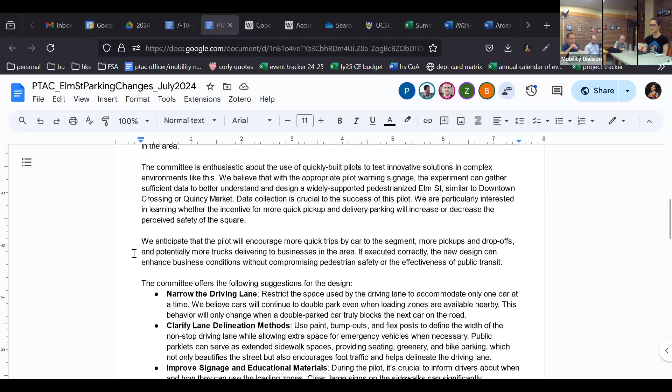For them to at least consider that this could be a big problem for the pilot. The second part was on the incentives, and what a policy on just allowing more cars to drop in and pick up the people, food and deliveries on and off the neighborhood would imply. And we do believe this would incentivize more cars on the road, which is not necessarily bad. We just need to make sure it's appropriate to what we all want to see over there.

And it potentially increases the ease of work for the business in the square. So there are pros and cons to the pilot.

We had a line back in the letter that simply says we would like to see other parklets and other infrastructure for other modes of transportation, specifically parking for bikes and some parklets for pedestrians, maybe some benches around, to help not only decrease or narrow the lane, but also help delineate the lane, and use that as an excuse to not only incentivize cars, but also pedestrians and bikers coming into the square.

So kind of trying to solve in a broader way than just a car problem. The points are highlighted in the letter. We talked a lot about how to clarify the driving lane, how to make sure, even if we say we just paint the ground, that cars can't just go around it, because if there is a way to go around it, it's likely that they will just double park anyway.

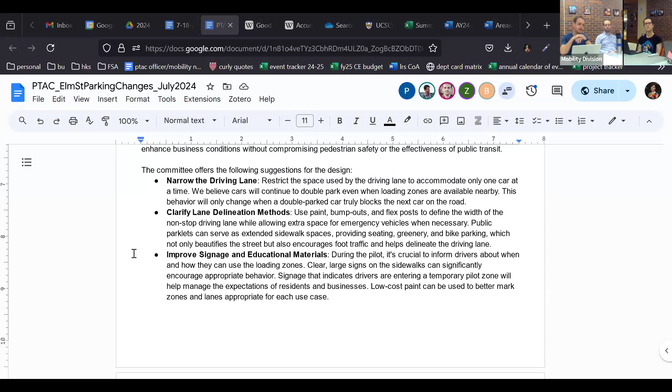And I think lastly, we had a point on daylighting and trying to make sure the crosswalks are free from any problems, both from cars, but also from bikers and other movement in the square. So we try to move away from parking large trucks close to the crosswalk, just for daylighting improvements overall when people are crossing the street.

And I think that's pretty much it. We're very much looking forward to seeing the results of the pilot. We think collecting data is extremely important. So we will see how well we can do that, and how well we can learn from this process, and hopefully figure out something that is different than, I think, anything else in the city right now. And hopefully it drives us forward in a nice way.

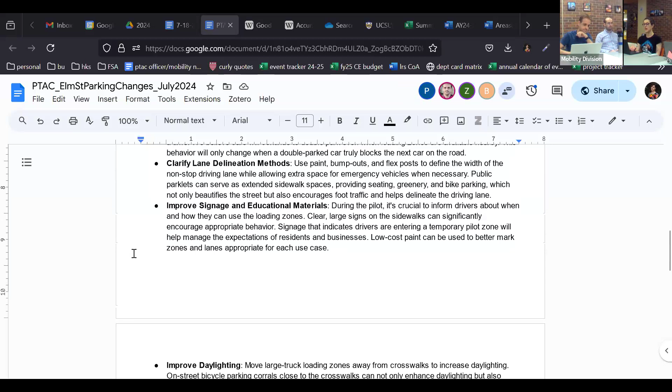Awesome. Thank you so much, Vitor. Anybody else who was involved in the writing of the letter want to chime in with any additional thoughts?

Okay, awesome. How about the rest of the committee? What are your thoughts on the letter? Do we think it captures all of the things that you were thinking about last month as we got introduced to the pilot? Are there things you would like to see added? Yeah, open discussion.

I'm having a hard time remembering all the details from the pilot from last month, but was the pilot written with 2 lanes of traffic on Elm Street in mind? No, it wasn't. But it seems like it's wide enough for 2 lanes, and so people use it that way anyway. Right, but with the parklets in, it makes it easier to delineate, and we had pavement markings before that indicate 1 lane.

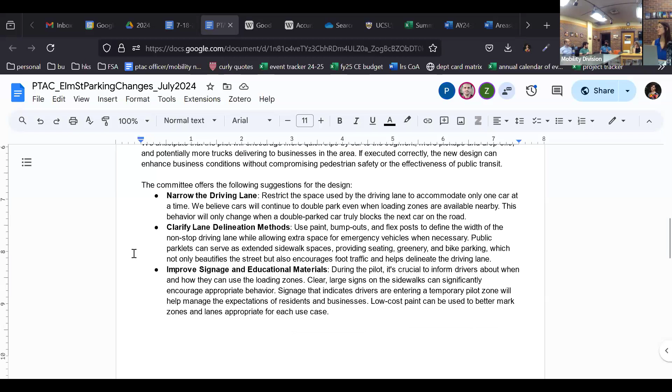So it's technically not 2 lanes, but the width makes it feel like it. I was very surprised when you said that last time. I went on Google Street View for that part of Elm Street, from November 2020, and it has all the markings on it. So I'm like, oh yeah, this is clearly the lane, and the parking section is a little larger, which is good for loading zones for trucks and stuff. So I feel like doing something like that again, if it's something the city would be willing to do, since it's a pilot maybe it wouldn't be, but that seems like a big win.

I hadn't considered it earlier, but having extra width near the handicap parking spots could also be pretty crucial for exiting and entering vehicles. So it's not as simple in many cases.

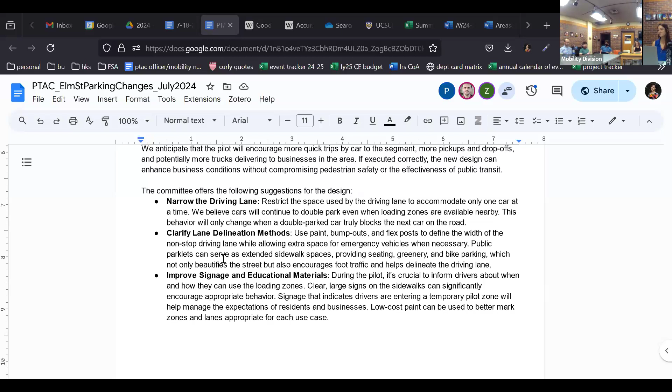I think this is a great addition to the pilot. I want to express support for the outline you gave us, Kate, because I think it's really smart to increase the amount of short-term parking on Elm Street, more so than there already is. That seems like the biggest use of the street right now, while maintaining a few spots for metered parking, just in recognition that there are a few businesses that could benefit from 2-hour parking, for example.

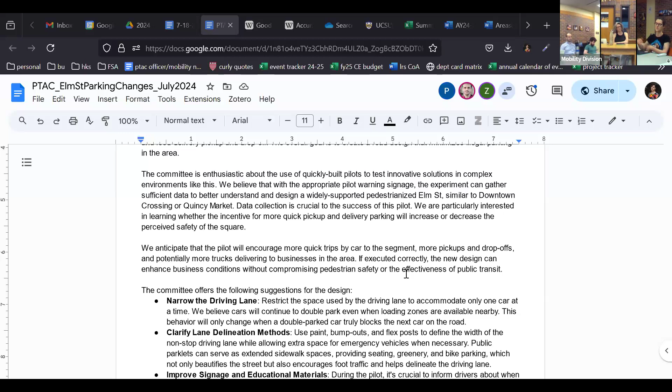I don't know if it's possible for this pilot, but for the future, I would love to see the bus stop actually be the length of the bus at some point. It doesn't seem like a huge deal for the tail of the bus to be hanging off the curb, but it does limit visibility to a certain extent for pedestrians. So in an ideal world, we'd love to see it aligned with the curb.

Oh, okay. Yeah, I saw someone putting one up further down. On Holland Street? Yeah, where on Holland? It's by the bus lane, right in front of Life Alive.

Is that the only other one that's going in? At this time, we put in new locations on Holland Street for the bus lane and the bus stop right outside the station, Davis Square Station, right in Davis Square. It is not the only location. We haven't determined where others are, but right now we're prioritizing locations where we have data showing it's blocked more frequently, which is primarily through parking tickets. We know that's not the perfect data point, but it's one we can build off of.

And happy to bring that back if that's of interest. Another time.

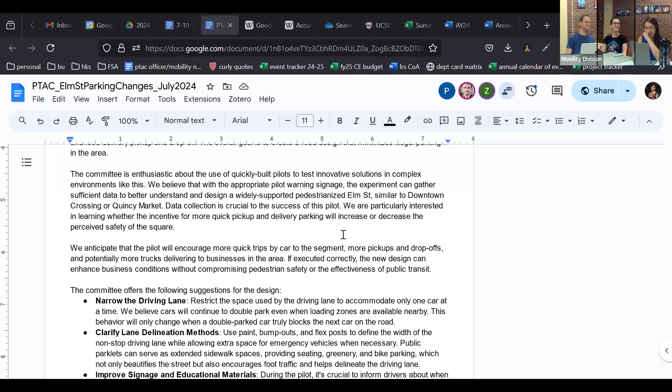I think I would like to maybe just open up the image of the pilot that you gave us last month, Kate, just to make sure there's nothing we're forgetting in this discussion before we take a vote on the letter. Just bear with me one moment, sorry, I have many tabs open today, so I can bring up the presentation really fast. Thank you, Kate. No, my apologies for not having it ready. Okay, here we go.

Would you like me to show the pilot proposal? Yes, please. Okay, and for folks joining hybrid, I'm just going to share my screen in just one moment. Can you all see that okay?

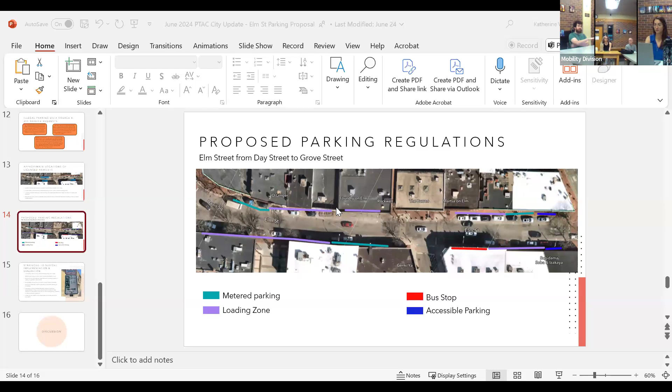This may be a bit of an aside, but has the city ever looked at temporary bus stop bump outs or bus stop extensions? I think I've seen in Cambridge, maybe during the pandemic, they had plastic sidewalk extensions essentially for bus stops, and then they later paved some. Is that something you've ever considered?

Yeah, so just to capture what you described, using what we would call quick-build materials, which are - there are some products.

One product we looked at a lot is made by Zicla. You might have seen they sometimes have products called armadillos. There's a really good example in Chelsea, done outside a community center, where you can extend the sidewalk so it stays the same height using really sturdy plastic, and they're modular. Just like Legos, you can connect the blocks, and they've used it for an MBTA project in Chelsea. I forget the specific route, but if you look at the Chelsea Flower bus stop, you can see an example of the sidewalk extension.

In terms of our consideration, we haven't determined if this is the location we would try it at this time, and the timeline of implementation would change, just to procure the products.

Any other thoughts on our stance, after being reminded of that?

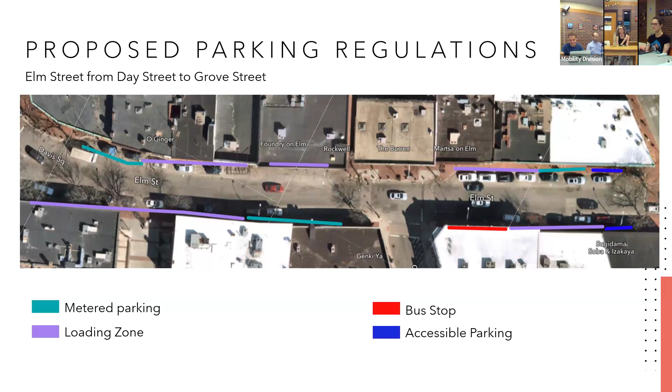So I motion that with the changes we've talked about today, we send this letter to Mobility as soon as Vitor is ready with a final draft. Do I have a second for that motion? I'll second. All in favor? Aye. All opposed? Abstentions? Okay, great. Thank you so much, everyone. Yet another letter.

So our next discussion or agenda item is on the latest proposed designs for Tufts Street. This is a project we've been talking about as a committee for almost a year now. So new members, this is kind of the second round of designs for Tufts Street? Third round of designs. It was 2 concept alternatives, 1 more developed concept, and this is the third kind of. Okay, cool.

So we've been engaging on the designs throughout the whole process, and this is our next chance to do so. Kate's gonna give an overview of the project and also the latest designs and what sort of feedback has gone into shaping those latest round of designs.

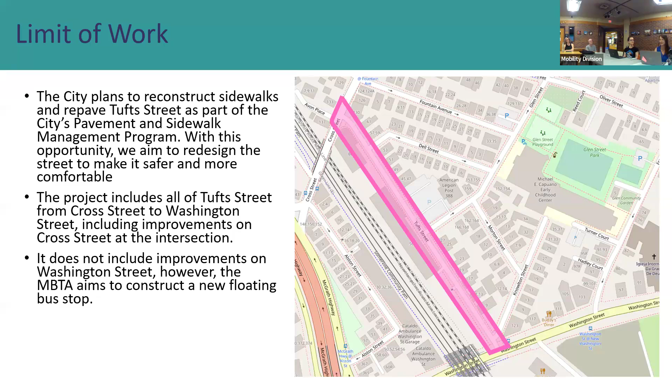Perfect. So as Alessandra described, we began this process about a year ago. We've gone through a couple iterations and we're now at the stage of what we call our 80% designs. This is where we're near final and moving towards finalizing those designs to prepare for construction. But we wanted to bring it back out to folks to see, did we capture what you had talked to us about and met the goals of the project, which is really to dramatically increase safety and truly construct a neighborway. Neighborways are designated in the bicycle network plan.

These are supposed to be very low volume streets. So even though this is in the bicycle network plan, there's co-benefits of just reducing speeds and the amount of vehicles on the street to make it a more comfortable place to be, especially when you're walking or rolling.

There are components in neighborways that include more shade coverage, so that you can have more comfort on the street. Art can be included. It's really a place for people and less about vehicles.

We've got some standards drawn from the National Association of City Transportation Officials, or NACTO. I think we talked about that a little bit in the past, but it's a really helpful guide for urban planners to look at making sustainable safe streets.

We've designated these in a lot of our areas that either are perpendicular to those long main streets or run parallel. The perpendicular is mostly because of the lack of north-south connections we have in the city, but also parallel. There's folks who might feel really comfortable being on Broadway and biking, but there's some who might feel much more comfortable—I'm picking one that's existing, Hudson Street, which parallels Highland.

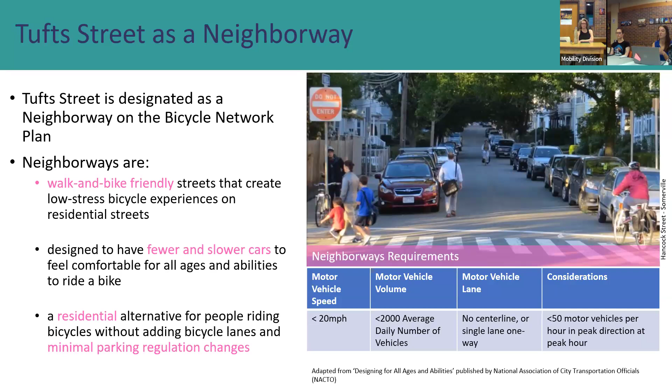So there's lots in this presentation. I hope you take the time, but if you have any questions, I'm happy to pull back to the slides. We try to do a lot of due diligence in understanding the needs of the street.

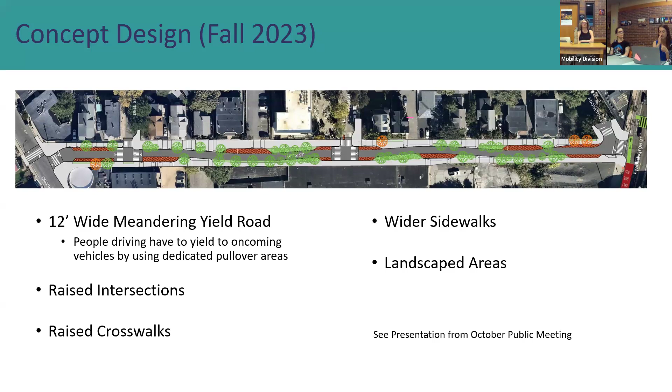So we looked at operations. We had a concept design in the fall where we did a full yield street, which we aimed to narrow to 12 feet wide with dedicated pullover spaces to really calm speeds. We did some testing on that, and I'll get into that in a little bit.

If you're interested in hearing what we heard, we produced a couple of community engagement reports on the different phases where we talked to folks, and PTAC hosted a walk dedicated specifically to Tufts Street to gather input and learn more. Feel free to check that out.

I'm going to focus specifically on the pedestrian components of the feedback. As Alessandra described, crossings were the thing we heard about the most. In the concept, folks really liked the new crossings across Tufts at Glen Street and Dell Street, because there are none existing now, and that they would be raised as raised intersections.

Folks talked a lot about the Glen one specifically too, because you can access the Capuano—it's always nice for residents, but there's a high amount of folks traveling with young children. There was a lot of excitement around the raised crosswalks, especially across Cross Street.

Around the crossings for Washington and Knowlton, there was more of a 'we can configure it a bit different' feeling. There are some curb extensions, but what does that look like for bike movements? How do you make it easier? Knowlton specifically is at a tricky angle—I don't know how best to describe it, we can look at a map again—but that whole three-street approach makes it really challenging.

We had a lot of support for trees and green space to make the walking experience more pleasant. There's also a special designated Audubon site, Mass Audubon, at a residence here—one of the first that is both a hair salon and a protected area for birds. We met him on our walk. Fun fact about Tufts Street.

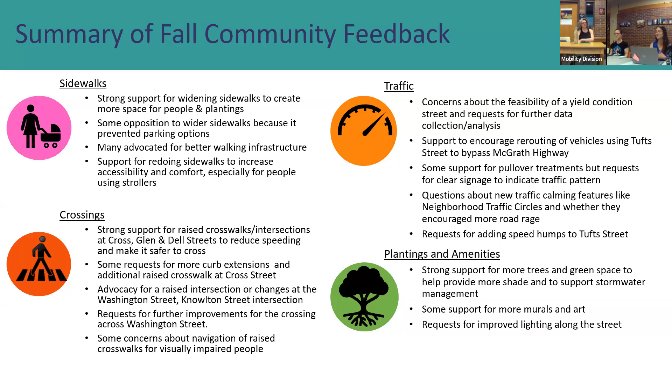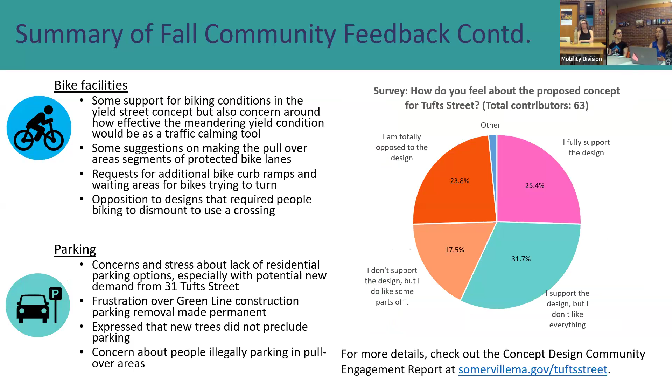So if you're interested, please dig into this. I think one of the things that came up in the yield condition was, with dedicated pullovers, how do they function, what does that look like, and there was still some desire for parking options. So we did some testing—a small demonstration on November 14th, where we tried to create that yield condition using traffic cones.

And use some variable message boards to indicate the change. The gaps are where you would have those pullover spaces, and the fire department joined us to test both the tower truck and the regular truck.

It was really cool to test it, and some things we really learned were that the pullover spaces need to be much longer. That now informs the design we're about to go through, especially to account for things like folks maybe illegally parking in the pullover spaces, when really that can cause gridlock and folks aren't able to pass.

Especially at the intersection of Washington and Tufts, where we just saw more traffic turning onto the street, we also needed to account for driver behavior. As we all know, some folks might be more aggressive, while others might be more accommodating and yielding.

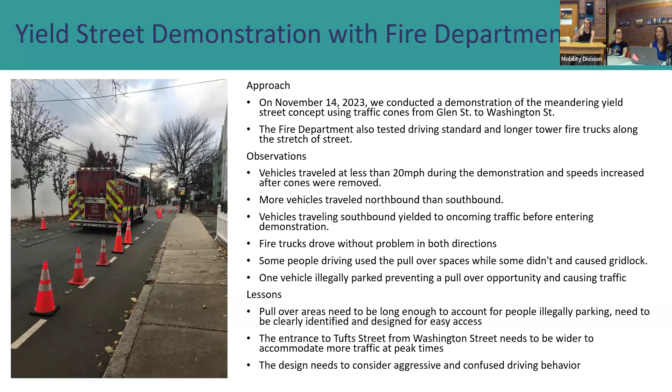And then, if you're interested, we did some parking utilization analysis. Those were all kind of questions that came up in the first round, and I wanted to do that due diligence in between.

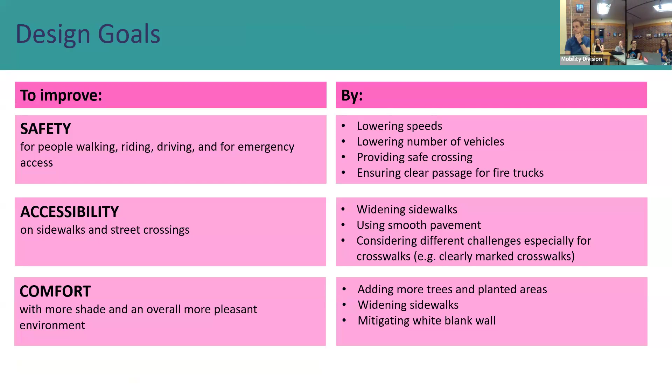So what is the updated design? Just reminding folks, there are three main goals, along with really constructing a neighborway: safety, accessibility, and comfort.

If you can see this on your screen, if you prefer a larger version, there's also a full street rendering available in those links that I sent you all. I'm just going to walk us through from the north to the south side of the street.

Overall, we went for a wider Tufts Street. It's not wider than it is now, but wider than the concept. This would be approximately 20 feet, about 10-foot travel lanes, which is very standard in the city, unless you're on a main street, which would be more like 11-foot wides or maybe a bit wider.

We proposed pinch points, where you expand the sidewalk into the roadway to narrow it — that's the term, kind of pinching the street. We put it at 12 feet wide. This would allow one vehicle to pass with still enough room, so that you're not really squeezed up against the curb.

We used this opportunity with the pinch points to create more landscaped area, and also allowed us to have a larger sidewalk space for full clearance of use.

In your sidewalk, you have your clearance space for folks to walk and roll, and then you might have your furnishing zone on the sidewalk, which includes your trees and utility poles. There were some utility poles located directly in the middle of the sidewalk as it exists now, and since it can be quite challenging to move these poles as they're not infrastructure owned by the city, we looked at ways to create a wider sidewalk feel, creating new landscaped areas that accommodate around that, including fire hydrants or any street lights.

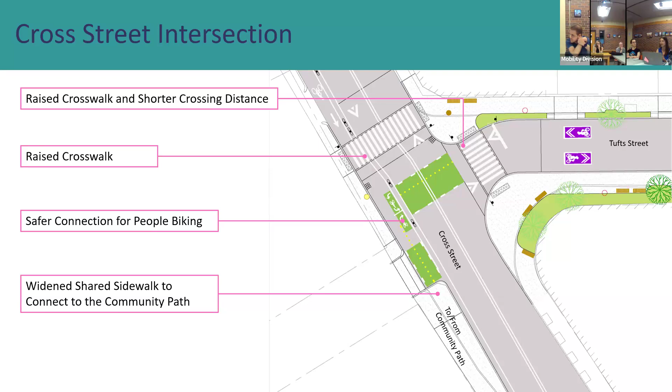So maybe I'll pause. Oh, I'll just walk through a couple other components, and again, happy to answer any questions. I'm focusing on the pedestrian transit examples, but happy to talk through any of the bike facilities as well.

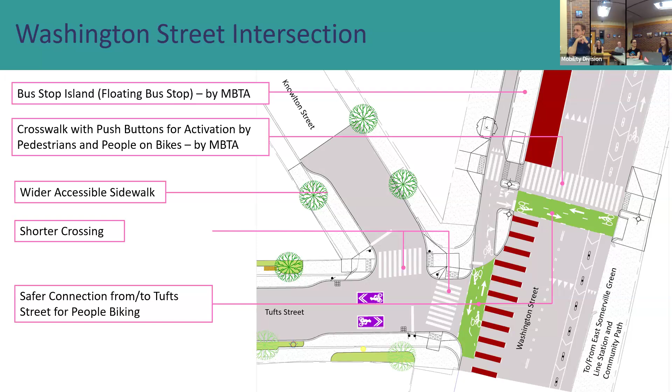Just to note in terms of biking, you'll notice there's purple pavement markings. These are real. We aim to paint purple neighborway markings to help indicate that this is a neighborway. This will match purple signage that is part of the Quick Build project. And fun fact, these will be our first bike icons where we specifically picked ones that look like women biking, as many don't. We're just really excited about that.

You're very familiar with raised crosswalks, but we try to go through the different elements being proposed. This is a couple precedents of pinch points. There are some that can be used purely to install more greenery, or you expand it for sidewalks. Right now we're looking to add more greenery that supports what has just been proposed in the pollinator action plan.

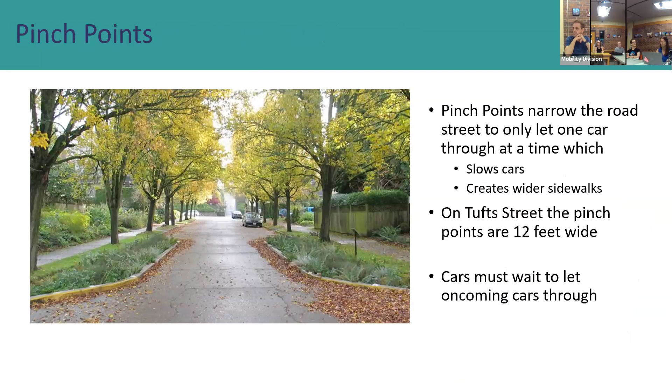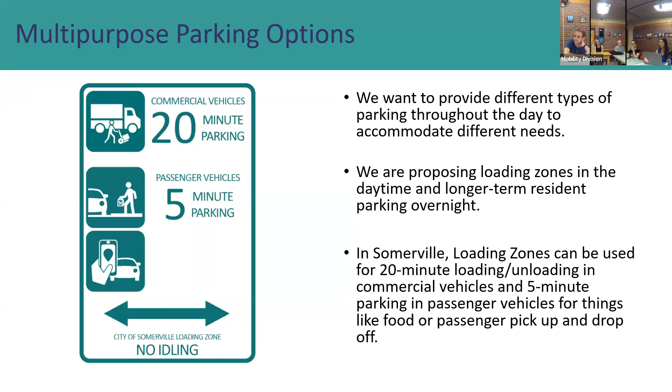There's some more information about the neighborway treatments. Around the parking, we are proposing loading zones during the daytime, as there's still a lot of delivery needs. Some community members shared it was less about full-time parking, but being able to pull over, unload your groceries, bring your kid inside, without having to park away and bring all that back. The real desire was for overnight parking. So our proposal is to then have it be resident permit required after. But we haven't determined the times, and that's what we're looking for feedback on, both the regulation types and the times.

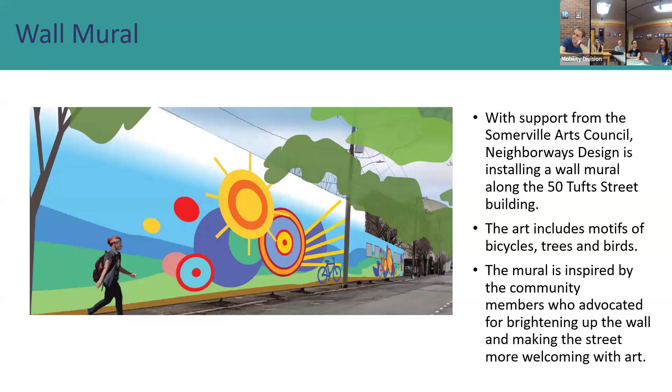And then the mural, which is really to just be bright and beautiful. There's motifs that highlight the biking aspect, and also a lot about the trees and birds, again for the specific Audubon site. Maybe I'll pause there and bring us back to the full rendering, for questions and comments.

This is Ginny. Maybe I shouldn't be so picky here, but it sounds like you're adding a lot of useless eye candy to these streets. Why?

Ginny, could you tell me a little bit more about what you mean? I'm not quite sure. Well, trees and things like that, I guess they're great for people who can see them, but problematic for those of us who can't.

Okay, well, if your question was why, it was something we heard a lot from community members who live nearby on the street, to reduce the heat and create more greenery along the stretch. That was the motivation for including them, along with meeting some of the city's goals to increase our overall tree canopy. But thank you very much for sharing that feedback.

One thing that comes to mind is, I do a lot of cycling, and with the bump outs, the pinch points, I tend to stay as far right as possible to stay out of traffic. But with the bump outs, I feel like I've got to look over my shoulder and make sure no one's coming, then navigate around them. Just because I find a lot of drivers aren't on the lookout for cyclists running alongside them. I don't come across pinch points that much cycling around the city right now.

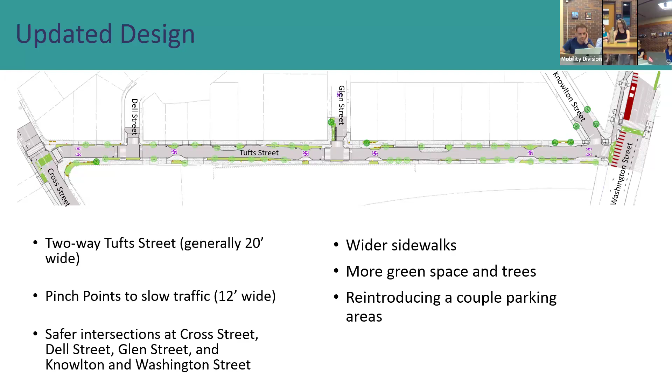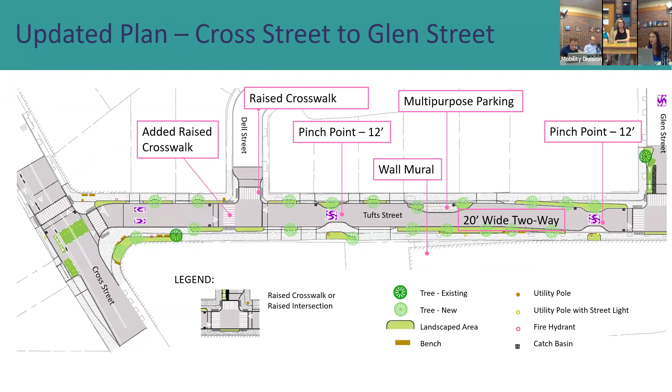For the parking, is it just those two spots marked D on one of the maps? Yeah, in the full rendering we labeled them with letters, I'll pull them up. Between Dell and Glen Street, the parking area is about 20 feet, the length of a parking space. Then between Glen and Knowlton it's about 40 feet, so two vehicles could fit, or maybe a UPS truck—a box truck.

So that's envisioned with having textured pavement or something to help indicate it's a parking area separate from everything else. That's what we're proposing, and it might even be slightly raised, using curbing to create a level that's not quite at street level.

I like that—if no one's parked there because it's a loading zone, that turns into a pinch area that a bike could ride through if no one's parked. Well, the one between Glen and Knowlton—the other one has trees on both sides—but yeah, it could make another area to detour.

Any other thoughts, questions, anything you would like Kate to go more into detail on in the presentation that she did?

For the bits to get around the utility poles where there will be landscaping, will there be some sort of textured surface or something to act as guiding for people with limited vision to walk around?

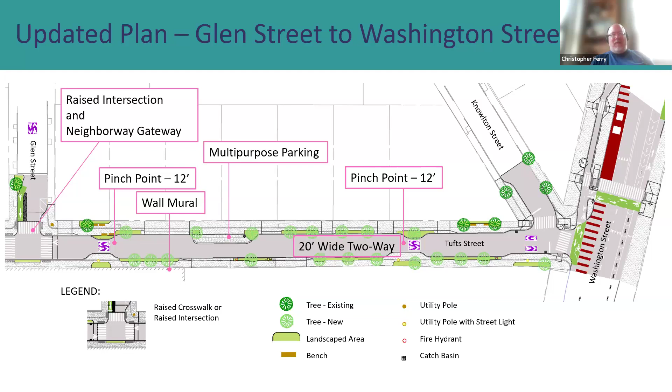A completely off-the-wall idea, but has anybody ever looked at instead of putting poles in the right of way, having Eversource or the city pay a nominal fee to people who have the buildings there and have it connected to the buildings? I'm not sure, but I can definitely ask engineering. There's probably a reason it can't be done, but just a thought.

So Kate, what is most helpful to you from us at this point? It sounds like we have some questions and concerns, but perhaps not anything substantial enough to merit a full letter. So I'm curious if we should try to come up with more content for a letter that would be helpful to you, or just try to summarize what we've said tonight. It seems like you've been taking notes - just what's most helpful for you at this point from us?

Yeah, our biggest goal was to come back and, in the previous comment letter, answer some of those questions, and then also to check in and see does the proposal match the goals for the neighborhood. And in any reconstruction project, our aim is really to meet our Vision Zero commitments. So the conversation's been incredibly helpful for us.

If PTAC chooses not to create a comment letter, what I would do is just take all the notes from this, also refer to the meeting minutes, and incorporate that in the community engagement recording. And if there are any outstanding questions, I'd probably respond to those, which I could do in a follow-up meeting. So at this time, we've received what we need to move forward in the design, but we're happy to have more time if you need it.

Great, how do folks feel about that going forward? Ruby. And then remind us when we can expect the next updated design?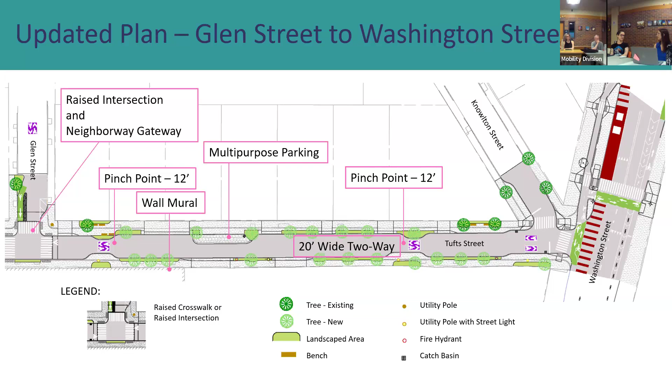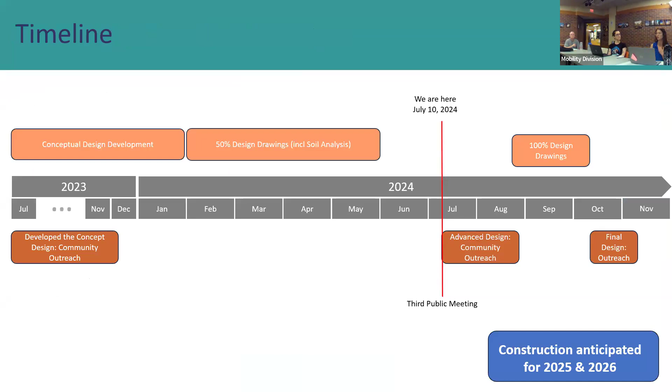Yeah, so it would be the final design. I'm just gonna take us back to the timeline. We are currently in July, and until about mid-August we're reflecting feedback on this updated design. Then through till October we're gonna work to finalize those design drawings and prepare for construction, which means we take that final design, go out to bid for contractors, they bid on the project, and once we have all of that confirmed, construction could take place between April of 2025 through to November of 2026. But we'll have a better idea once the contractor's on board when construction might start.

But we're gonna pull it all together, then communicate out to everyone who's been involved in the project, as well as follow all of our standard communications to notify folks about the final design, and keep folks up to date on the project website around when construction begins. Then our construction communications team will step in around all the construction communications.

Thank you, Kate. Thank you. Appreciate it.

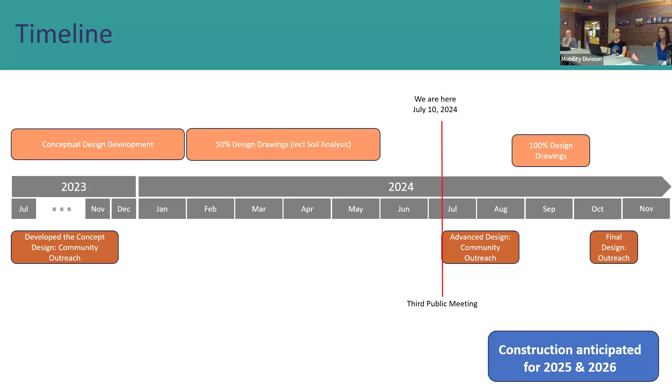The last section of our meeting tonight is really just open time for questions and discussion. We don't always do this, just as a disclaimer, but we had some extra time after we covered the first two agenda items, and figured since we're still new enough in our round of new members, it might still be useful to have an opportunity for open conversation. So new and old members can bring up anything they would like - if you have questions about the onboarding materials, or anything you've been seeing in the city that you think we should take on at some point, goals for the rest of the year, et cetera. Now the opportunity.